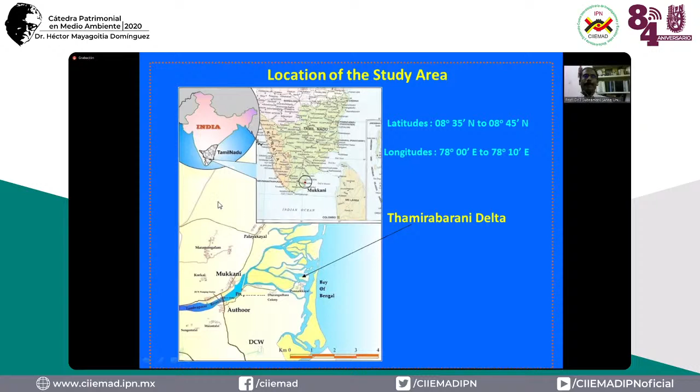In Tamil Nadu, there are many river basins. In the center of the state there is a huge river system called River Kaveri. And this river basin is located in the southern part of Tamil Nadu. I have chosen this deltaic area for detailed investigation. This river basin is known as Thamirabarani River Basin.

It originates in the hilly areas known as the Western Ghats. The main stream of the river is considered to be a perennial river, so throughout the year we can expect water flow in this particular river. Finally, this river confluences with the Bay of Bengal. So here we have the sea, Bay of Bengal.

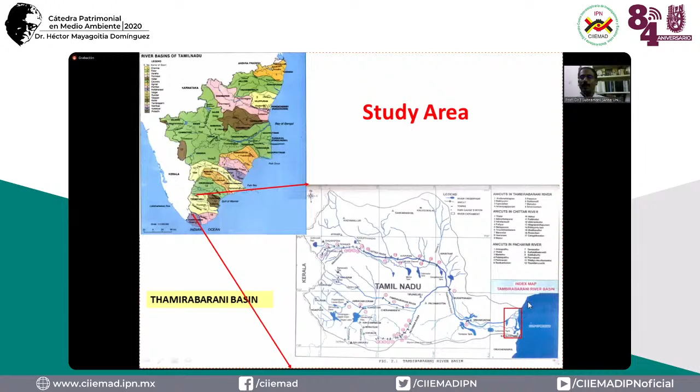Then coming to the problem, here you can see the photographs and the satellite image. Initially I have taken this satellite image for detailed study, and this is the IRS-1D. Name of the satellite is Indian Remote Sensing Satellite 1D. And the name of the sensor is LISS-3, Linear Imaging Self-Scanning Sensor 3, with the resolution of 23.5 meters. Spatial resolution of this satellite data is 23.5 meters.

So here is a false color composite image, and the red color indicates vegetation. So all along the river course, Thamirabarani river course, we can see thick vegetation. And here, this is actually a sand dune, very close to the coastal area. It is green in color because I told you it's a false color composite. And in this area, we can see a lot of salt pan activities.

Here you can see the photographs, and this is the barrage or weir constructed across the Thamirabarani river. This is the last weir. There are so many weirs constructed in the upstream, in the hilly areas, and here, this is the last weir or barrage. Then there is a bridge here, constructed by the Highways Department.

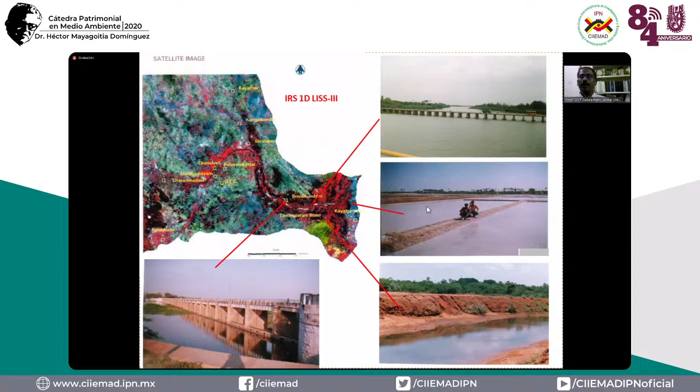And here you can see a lot of salt pan activities are going on. They are producing salt. Sometimes they are using seawater directly, and sometimes they are using saline groundwater for producing salt. Here in this picture, you can see there is a pumping station. This pumping station is located here.

There are so many industries located in this area, and of course, they are processing the beach sand. In this part of the coast, the sand has a lot of heavy minerals, and this coastal area is known for heavy minerals. So many industries are processing the heavy minerals, and they are extracting titanium from ilmenite and rutile, and thorium ore. Monazite is also enriched in beach sand, and we have garnet, we have magnetite. So many heavy minerals are available in the beach area. That is why so many industries are located in this region.

They are simply bringing the sand from the coastal area, processing the sand, and separating valuable minerals and metals. And for their industrial purpose, they are directly taking this river water. The industry people are directly taking the surface water, river water, for their industrial applications.

So particularly during summer season and also during high tide period, the seawater is entering into the river channels and contaminating the river water. This effect is noticed up to the place called Eral, about 7 kilometers inside. Because of this seawater incursion, people are not able to use the water for their industrial applications. And farmers are also struggling a lot. They are not able to use the river water as well as the groundwater for their agricultural activities.

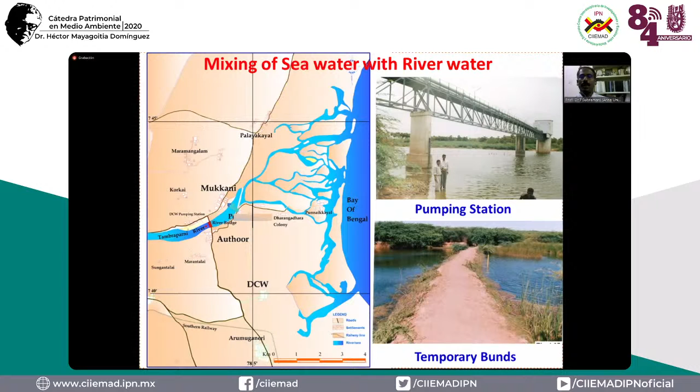So knowingly or unknowingly, they are deepening the river channels. If the river channels are deepened, then more seawater can enter into the river system. So this mistake they are doing in the coastal area. Here you can see the river channels. Once the bund is broken and the sand material is pushed into sea, they are again making the bund. So it is a continuous phenomenon. These bunds are completely washed away by the river water.

And to understand the tidal fluctuation, we have fixed a scale. This side is towards sea and this side is the upstream river side. So we fixed a scale here to measure or understand the tidal fluctuation at this particular area.

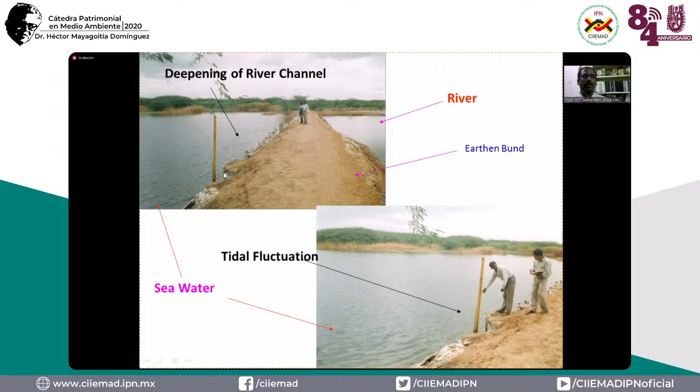Then here we can see another important issue. In this photograph, you can see good agricultural fields. There are a lot of trees and some crops. And what these poor farmers are doing is simply converting the fertile agricultural land into salt pans. In some areas, fertile agricultural lands are converted into salt pans. Why? Because if they do agricultural activity, they are getting less revenue, less money. So to earn more money, they are converting the agricultural fields into salt pans.

Here you can see the salt pans, and because of this, the fertile land is affected. This photograph shows salt-affected agricultural land. It is not easy to go for reclamation of the contaminated areas. The soil is completely polluted. So not only the river water and the groundwater are polluted, the land is also polluted. Soil is also polluted. So this is the salt-affected land in this area.

And here you can see this gentleman. He is measuring the density of the water. Why? Because they are not taking the seawater directly for producing salt. They pipe and take the saline groundwater. When you go down, obviously the density of the water is more and the groundwater is more saline, so they are able to produce more salt. That is why people are using saline groundwater for producing salt.

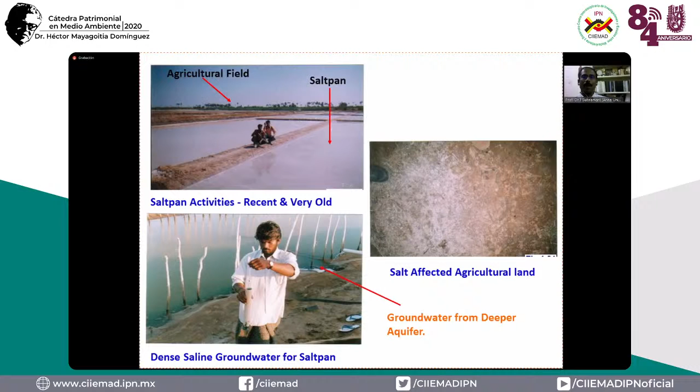Because of pumping of groundwater from the aquifers, seawater incursion or seawater intrusion is also taking place in the aquifer system. So it is not only spoiling the surface water or river water, it is also contaminating the aquifer system. Keeping all these things in mind, we have chosen this area for detailed investigation.

Initially, we prepared various thematic maps using satellite images and a geographical information system. These are some of the maps we prepared from satellite images and also based on already existing maps. This is the drainage map of the area. Here you can see the main stream, Thamirabarani River, and the distributaries. These are the major water bodies, tanks, in this study area. And you can see the major settlements or villages in this area.

This shows the watersheds or sub-basins in this area. This is the major basin, and within the basin you can see sub-basins and watersheds, and these are the names of the watersheds. And in this map, this is the land use map of the study area. We can see various land use categories. For example, this is the salt pan. Salt pan is here, swampy area is here, and in this area you can find dry crops.

So here this map is actually a geomorphological map. And also I have marked the lineaments. These are all the lineaments. With the help of the satellite image, I have prepared this lineament map. So we have identified the major lineaments.

And you can see the swampy area, beach terraces, beach ridges. So many geomorphological landforms are identified, and you can see them in this map. And sand dunes. These are all the stabilized sand dunes, and you can find the sand dune here. It's a wind deposit. So this map gives various landforms in this area.

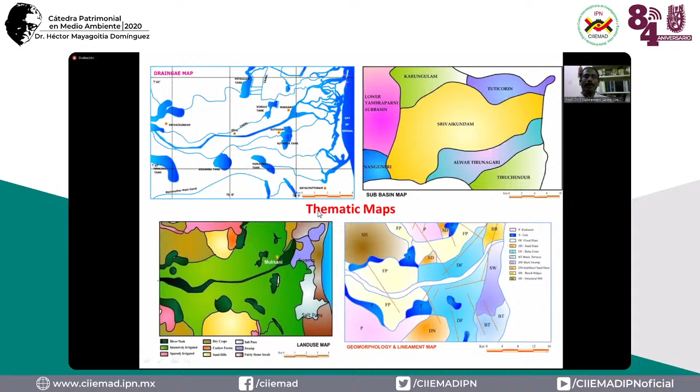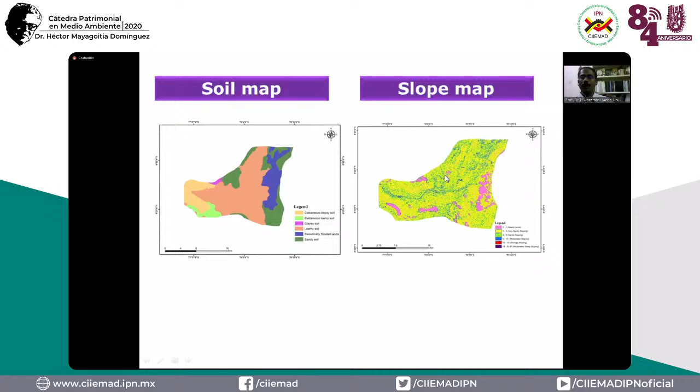So slope is also another important factor here. Because the terrain is almost flat or gently sloping, seawater intrusion is taking place. So we have to consider this slope also for detailed investigation. Then we collected secondary data from various government and private departments.

And I have already told you there is a bridge constructed across the Thamirabarani River in the deltaic area. At the time of construction of this bridge, they did a lot of estimation. For example, they calculated the discharge, how much quantity of water is passing through this area.

Then they went for pile foundation, so they studied the subsurface also, what kind of strata is available below the riverbed. So many details we have collected from the Tamil Nadu Highways Department.

Then, I told you this is the last barrage constructed across the river. It comes under the Tamil Nadu Public Works Department. From this government agency, we collected the surplus details, how much quantity of water is passing through this particular barrage. And here we can find the canals also. There are canals in this barrage on the right side as well as the left hand side.

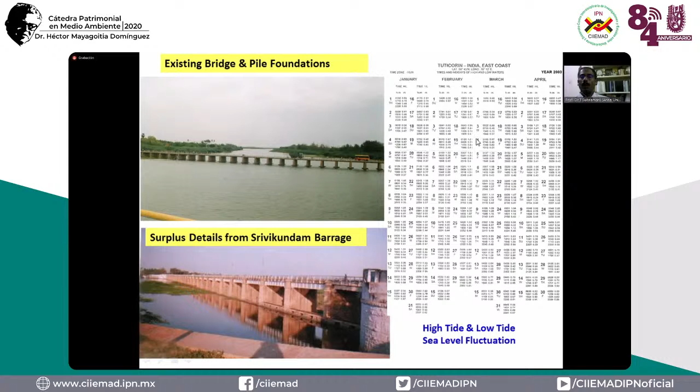And a port is also there in this area, the Tuticorin port. From the port we have collected data. We have collected the tidal fluctuation data, high tide and low tide details, from the Tuticorin Port Trust.

Then after collecting the secondary data, we went for land use land cover change analysis. So this is the land use land cover change detection analysis. We have taken the satellite image of 1998, and this land use land cover map was prepared. We have taken a few major land use categories and identified all the categories with the help of the satellite images.

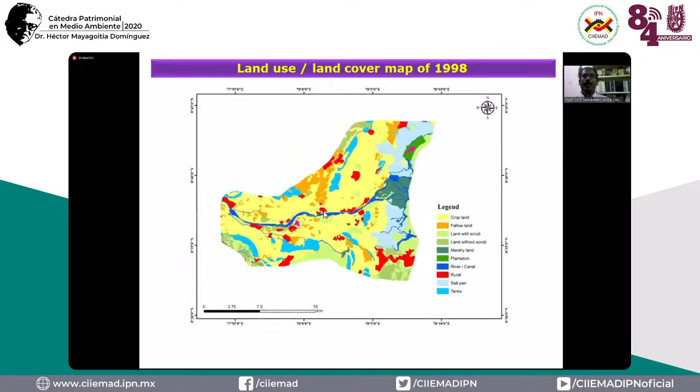So here you can see the cropland, fallow land, land with scrub, land without scrub, marshy areas, then plantation, then salt pans. So this is an important thing, salt pan activities. Then this is the land use land cover map of 1998. Then we prepared the land use land cover map of 2018.

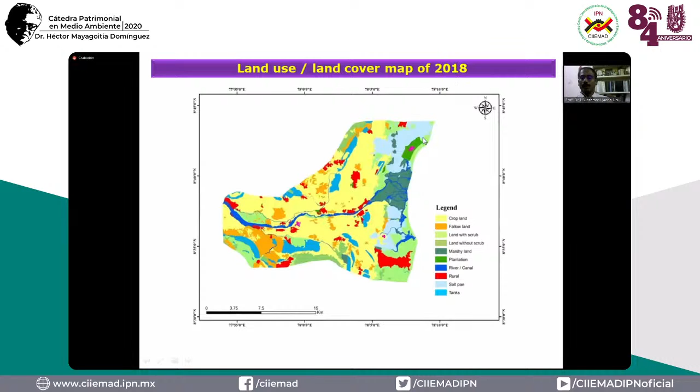So finally, we made a tabular column here. In this we can see the variation, the change detection. Particularly if you see the salt pan, the salt pan area has actually increased, by about 5.79 square kilometers, and the plus symbol indicates increase and minus symbol indicates decrease. Some of the land use categories decreased and some increased.

And of course, in the case of water bodies, rivers or canals, there is not much variation. And some of the lands with scrub and without scrub were converted. Okay, this is the overall land use land cover change scenario in this area over a period of 20 years.

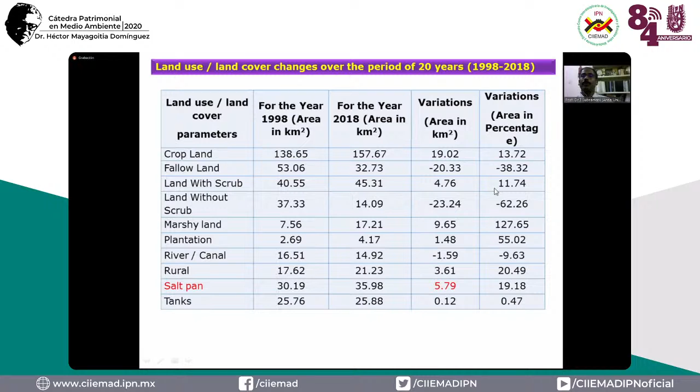Then we collected water samples, groundwater samples and surface water samples, for understanding the suitability for consumption purposes. In this area, these are all the sampling locations. This red dot indicates groundwater sampling locations, and this pink dot indicates surface water samples.

We collected 40 groundwater samples and 21 surface water samples during the winter season as well as the summer season. To understand the seasonal variation and the spatial variation, we collected samples during winter and summer.

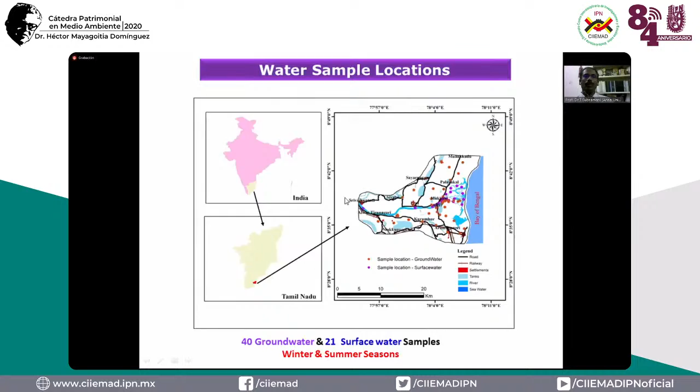So here you can see the summary of the water quality analysis. You can see the analytical results. We have presented the maximum, minimum and average values for winter season as well as for the summer season. This is for groundwater samples. I have mentioned 40 groundwater samples we have collected, and this is the summary.

So here you can see the TDS value. The TDS maximum is about 36,800 milligram per liter, and the average is 5,134 milligram per liter. We all know that as per the WHO, World Health Organization standard, if TDS is more than 1,500 milligram per liter, the water cannot be used for drinking applications. Here the minimum value is of course less if you go to the upstream side. The minimum value is 100, the maximum value is 36,800.

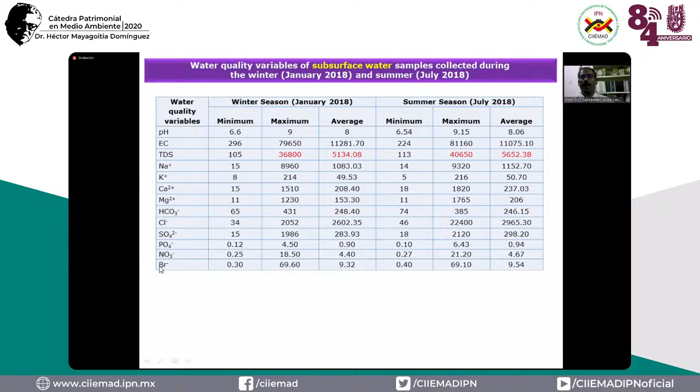Similarly, in the case of summer season, it is higher actually. The maximum value is 40,650 and the average is 5,652. That is why people are not able to drink the water in various villages or locations. And you can see the minimum and maximum values of the other parameters. Particularly for seawater intrusion, we must concentrate on sodium, chloride, and bromide also.

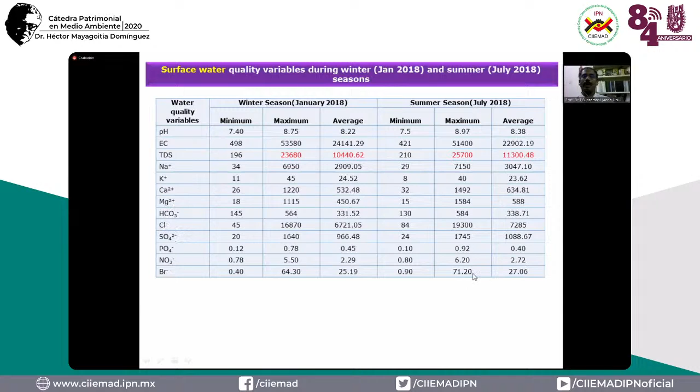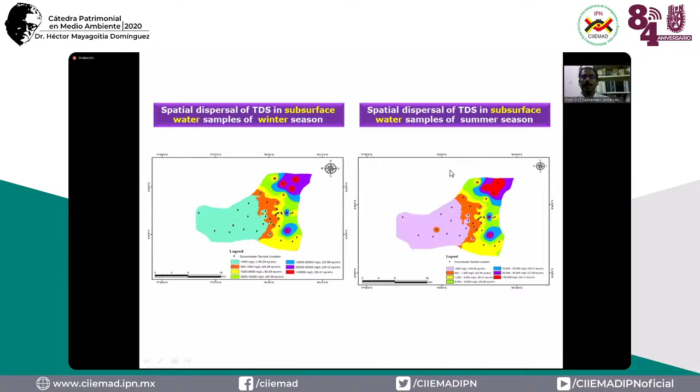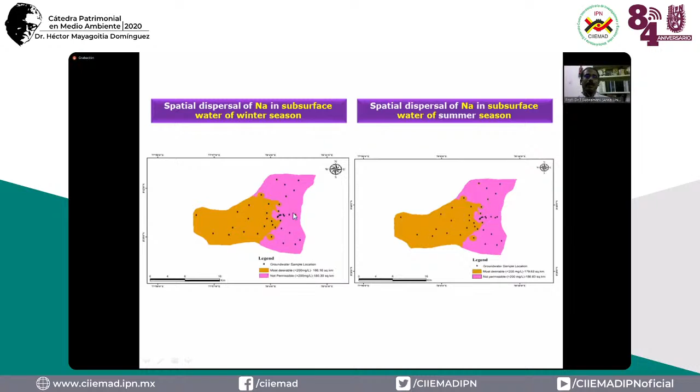Even this yellow, green, blue, pink, and red. This entire area is not suitable for drinking as per WHO standard. Sorry, this is winter and this is for summer season. And this is the scenario based on sodium concentration. We made two categories. If the sodium is less than 200 milligram per liter, it is suitable for drinking. If it is more than 200, we will not use it. You can see this area is not suitable for drinking, and similarly this area is not suitable for drinking.

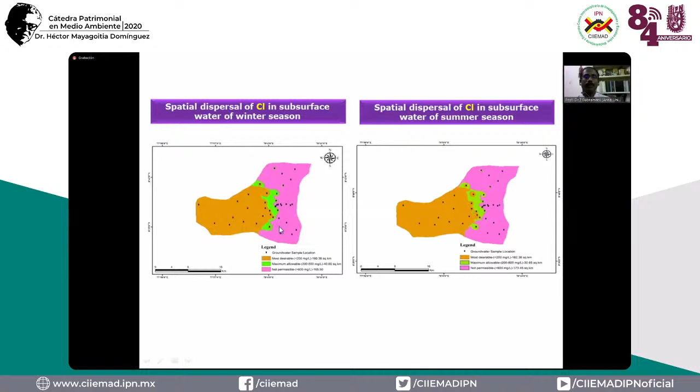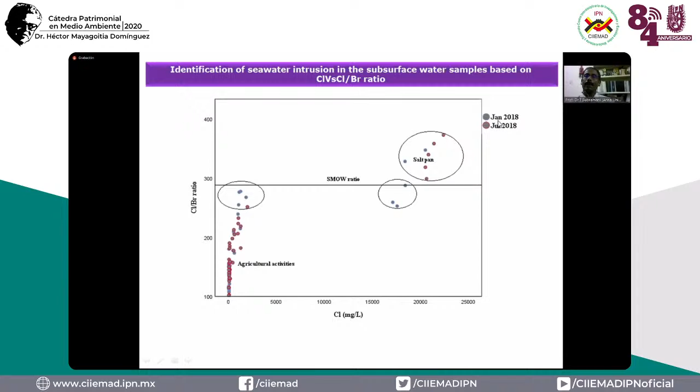Then finally, we have prepared this chloride by bromide ratio, and in this diagram we can see we have plotted the points. On the x-axis I have taken chloride, and on the y-axis I have taken the chloride/bromide ratio. This is the SMOW line, and some of these dots are indicating salt pans, and here you can see the agricultural activities. So this is an important indicator, and here I have taken the monsoon season samples, the summer season as well as the winter season.

This will reduce the porosity because the sodium content is more. Salinity is more, sodium content is also more. Then this water will reduce the porosity of the soil, so the plant roots cannot freely penetrate into the soil. The soil will become very hard, and finally it will affect the crop yield. So we cannot get more yield. Normally, what people will do is sometimes they will apply gypsum. Gypsum can give some kind of remedy.

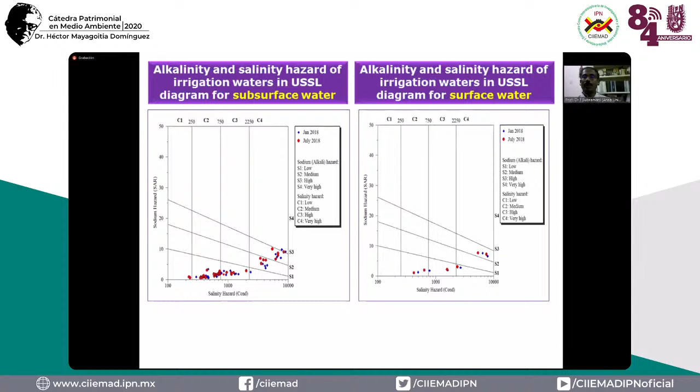And here also you can see the surface water samples, and some samples are representing this C4S3 field. So this water should not be used continuously, particularly for soils having poor internal drainage. It will affect the porosity as well as the permeability of the soil.

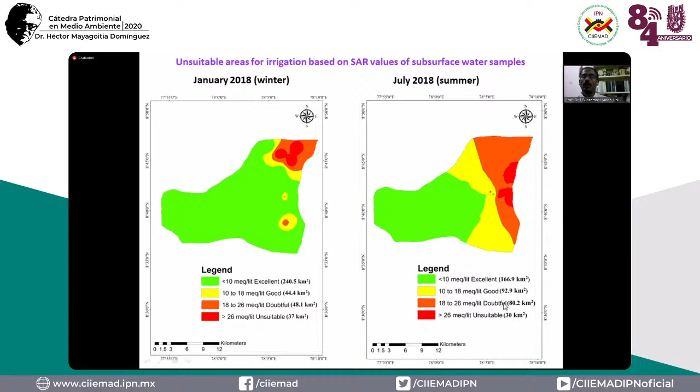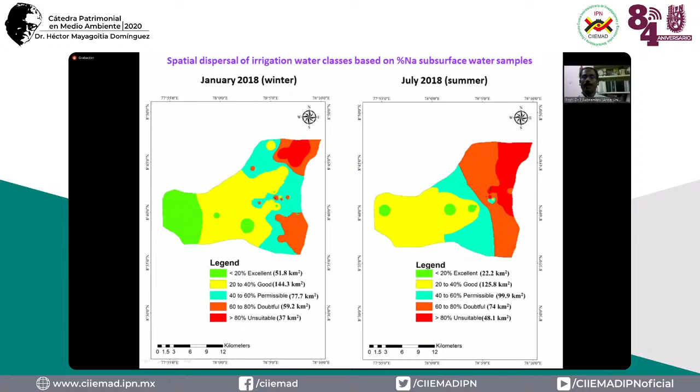The surface water is also affected. That is why the pumping station at this site is not able to directly use the surface water or river water for industrial applications. If the water is not suitable for industry, then the water cannot be used for drinking as well as for irrigation purpose.

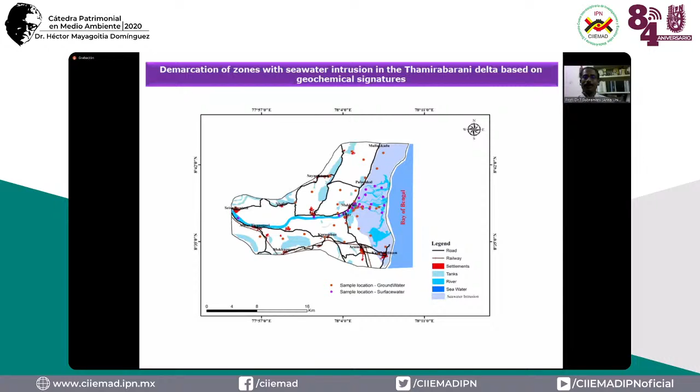So finally, we have assigned ranks and weightages. Based on the ranks and weightages assigned, we have used, of course, GIS to integrate or superimpose the maps and thematic layers. We have used GIS, and finally we have prepared aquifer vulnerability maps of winter as well as for summer season.

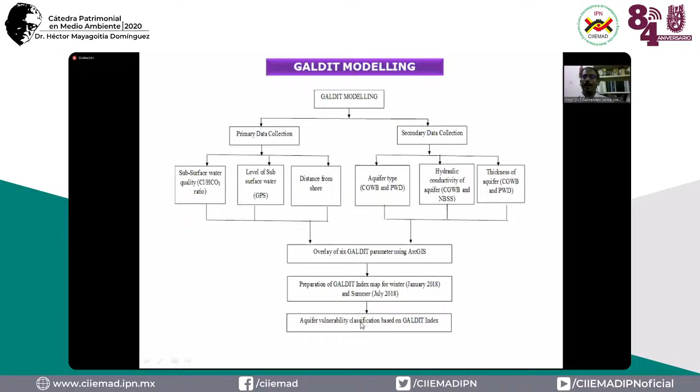And these are all the 6 parameters considered in this model. G in the GALDIT is groundwater occurrence, A is hydraulic conductivity of the aquifer, and L is depth of the subsurface water level, groundwater level, and distance from the shore is indicated by D. I is the impact of the current marine intrusion status. Then T is nothing but the aquifer thickness.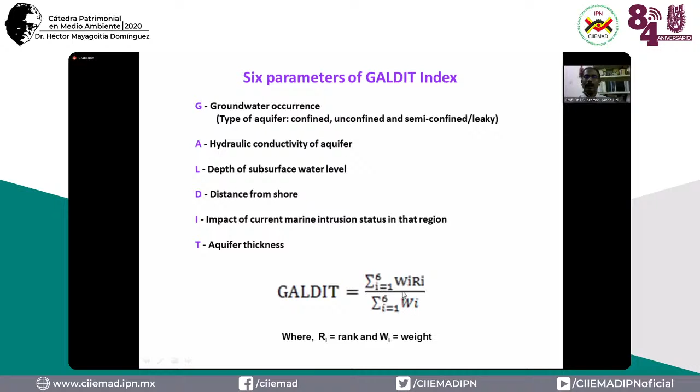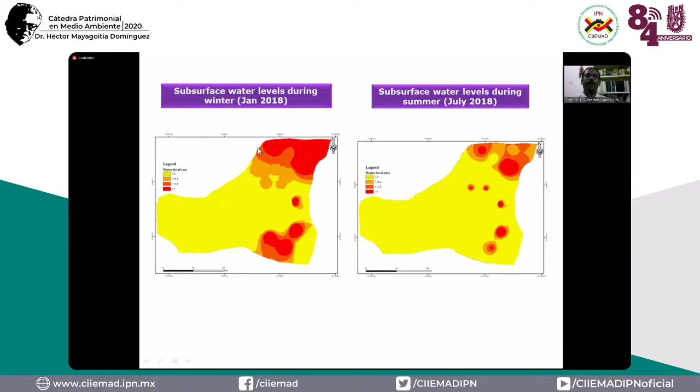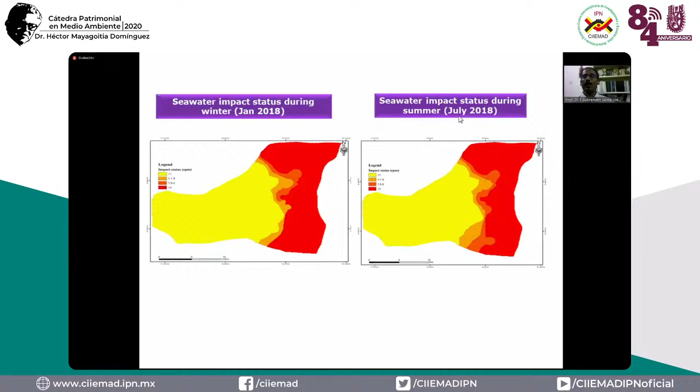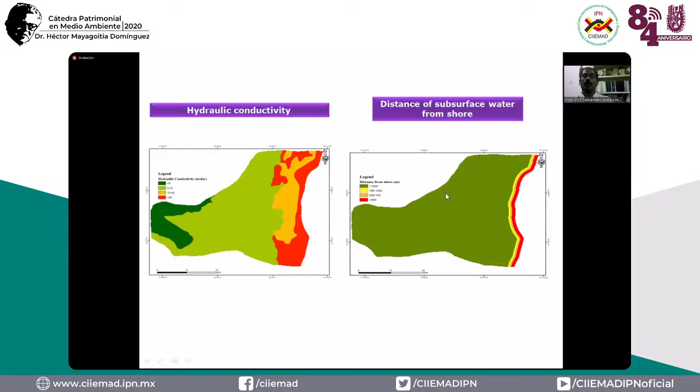And here you can see the hydraulic conductivity. Hydraulic conductivity is more in the sand formation. So here you see hydraulic conductivity is more here, and hydraulic conductivity is less here. And here you can find hard rock areas. And this is the map showing the distance from the shoreline. So 500 to 1000 meters. Above 1000-meter distance is indicated using this green color. So this is an important parameter used in the GALDIT index model.

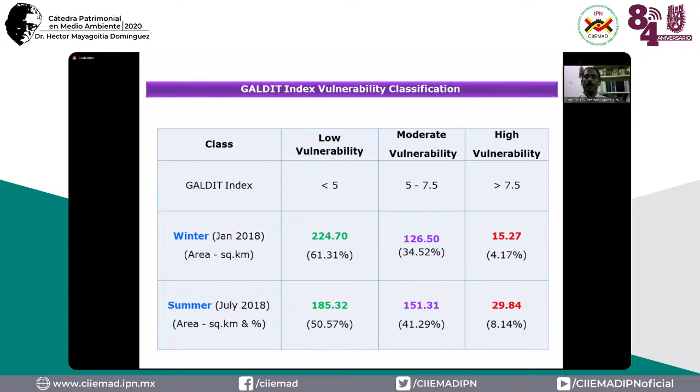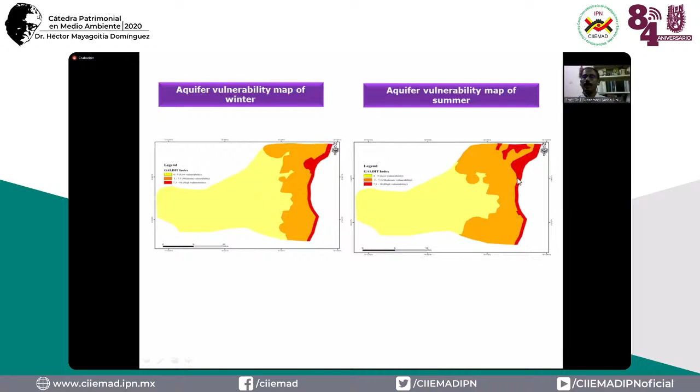So initially, based on the geochemical signatures, we have identified and demarcated the seawater intruded areas, and we have done this GALDIT model to identify the vulnerable areas. So this is the final map. This is for winter season, and this is for summer season. Here 3 categories you can see: low, moderate, and high. This is highly vulnerable for seawater intrusion, this is the moderate vulnerable, and this is low vulnerable zone.

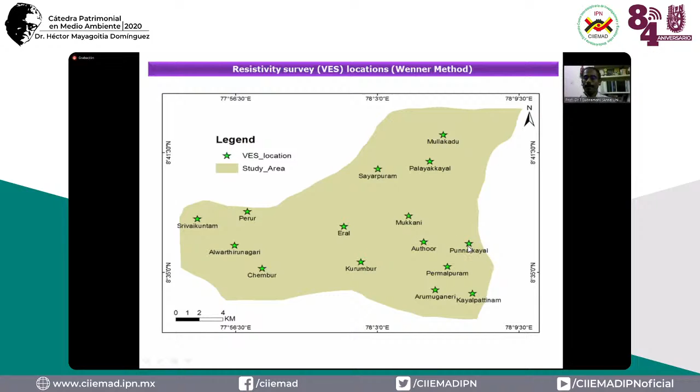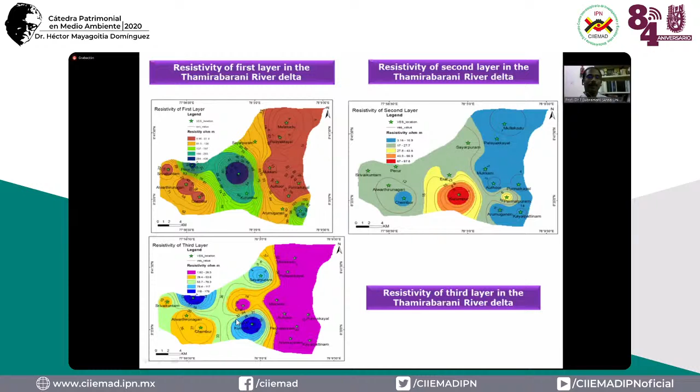So here you can see the values, and we have prepared the isoline maps as well as the zonation maps. Isoline maps are nothing but the contour maps connecting the points having the same values, and choropleth map is nothing but the zonation map. We made it into different zones for easy understanding, for easy visualization. And here this is the resistivity of the third layer. Then these maps are showing the thickness of the layers, the thickness of the first layer and the thickness of the second layer.

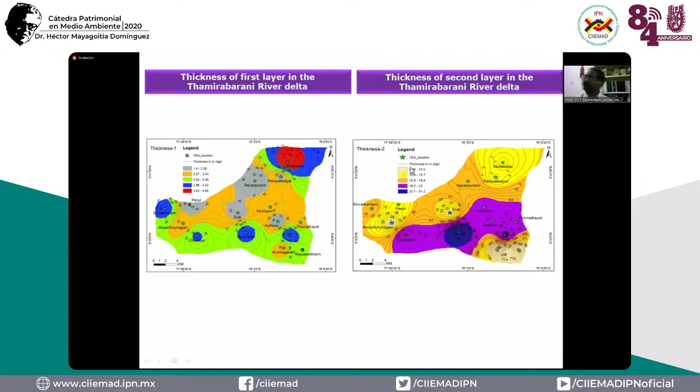Then finally we have compared all the methods. So this is based on the geochemical signatures, this is based on GALDIT modeling, and finally this is based on vertical electrical sounding. So almost you can see the match.

So based on the geochemical signature, this much area is affected, and here also you can see this is highly vulnerable, and here also the electrical resistivity survey is showing almost a similar kind of result.

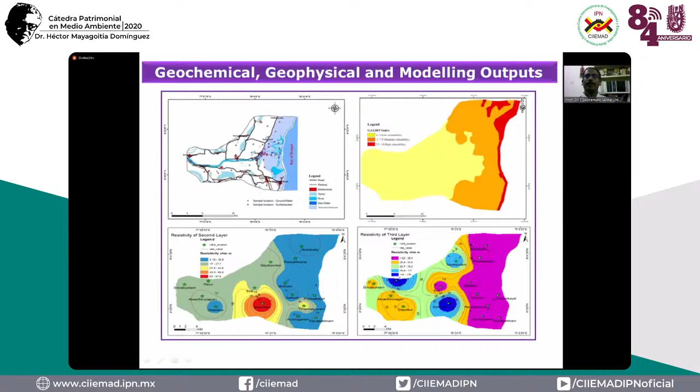Then finally, we have to give a solution to the people. Most scientists and geologists are approaching the problem, identifying the problem, collecting a lot of data, publishing a lot of papers, but we are not giving the solution to the public. So here we have given an engineering solution to the people. We cannot stop it 100%, so to minimize the seawater intrusion, we have given the solution.

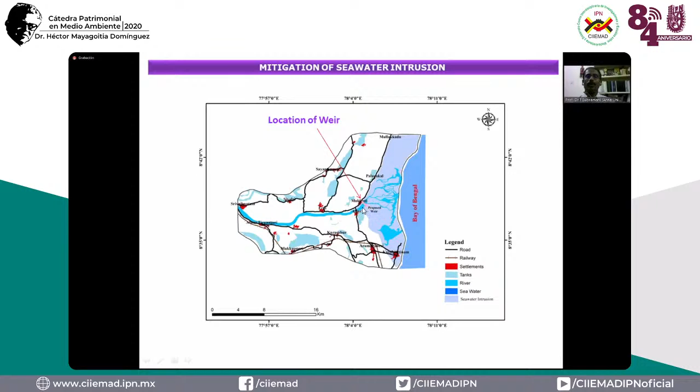Then, keeping all the data, we finally identified a site to construct a weir across the Thamirabarani river to minimize the intrusion. This is the place called Mukkani. We have identified this site for constructing the weir. It's a kind of solid weir. So we have done the design parameters.

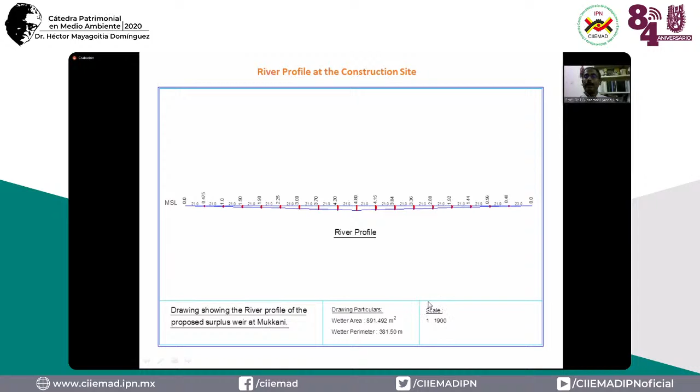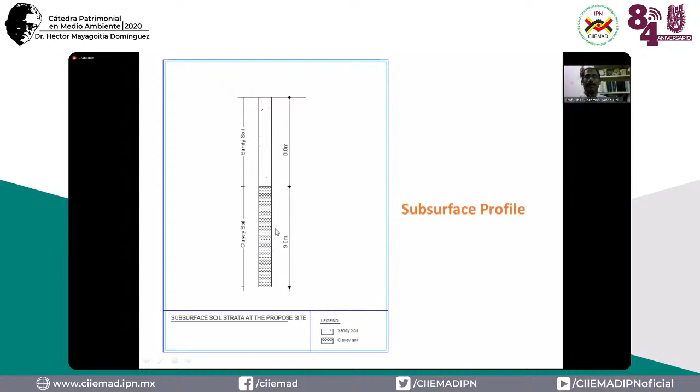And here you can see this is the profile of the river. So we got the river profile, in large scale; here the scale is 1:1900. It's a large scale map. Then this is the subsurface detail. On the top we have sandy soil, and below that we have clay soil. So accordingly we have to go for the foundation.

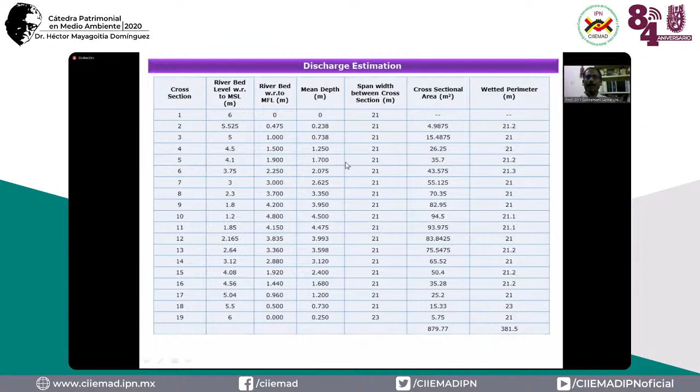Then this is about the river discharge. We got details from the Tamil Nadu Highways Department, and we also collected data from the Public Works Department. We have considered all these parameters: wetted perimeter, depth, river bed level, everything we have considered for the weir design. And here you can see the velocity and discharge calculation.

As per our calculation, we got the maximum discharge at the proposed site as 1873 cubic meters per second. This much quantity of water is passing over the area. At the time of the construction of the bridge by the Highways Department, they estimated it as 1450. So we estimated 1870, and they estimated 1450 cubic meters per second.

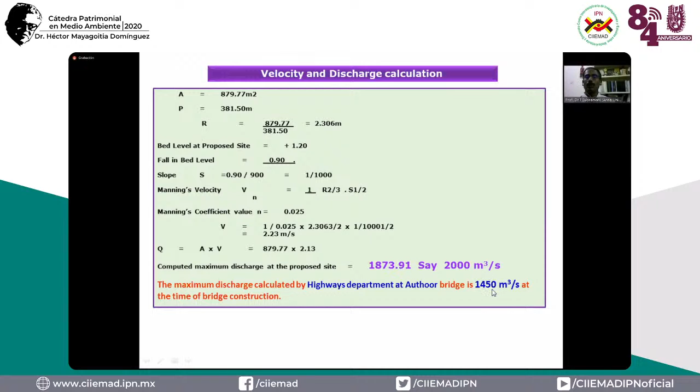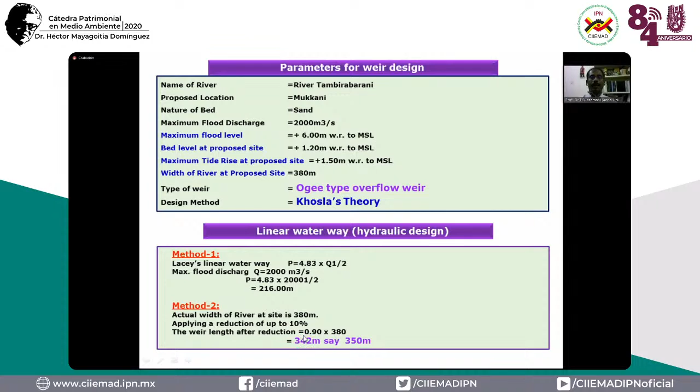Finally, we decided to construct an ogee type surplus weir or overflow weir, and we used Khosla's theory and Manning's formula for establishing the design parameters and linear waterway. We used two methods and got this value. The linear waterway we have taken is about 350 meters.

For the crest level, we decided to construct a 1 meter height solid weir across the river channel. If the height of the weir is more, the afflux rise will be more on the upstream side. It will submerge the area and act as a barrier for flood, so during flood season a lot of areas will be submerged or disturbed. That is why we decided to go for a 1 meter height solid weir in the deltaic area.

The crest level of the weir is about 2.2 meters. The bed level is 1.2 and the height of the weir is 1 meter, so the crest level is 2.2 meters above mean sea level. The scour depth we calculated using the standard formula, and this is the scour level we got.

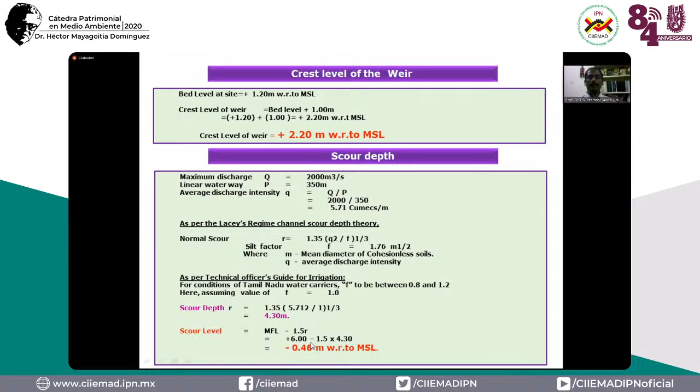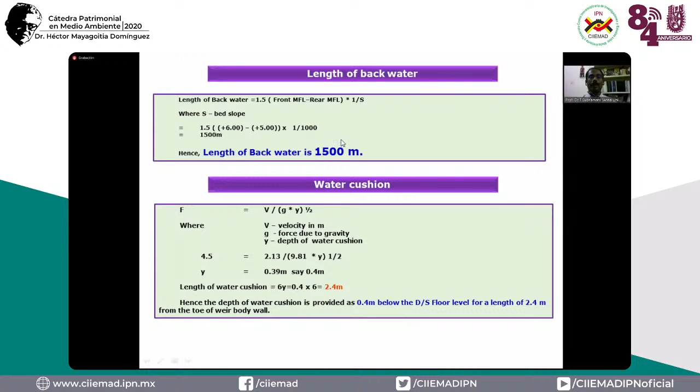Here you can see the length of the backwater. If you construct a weir, or put some hydraulic structure across running water, there will be backwater on the upstream side. It is about 1500 meters. And the length of the water cushion should be 2.4 meters.

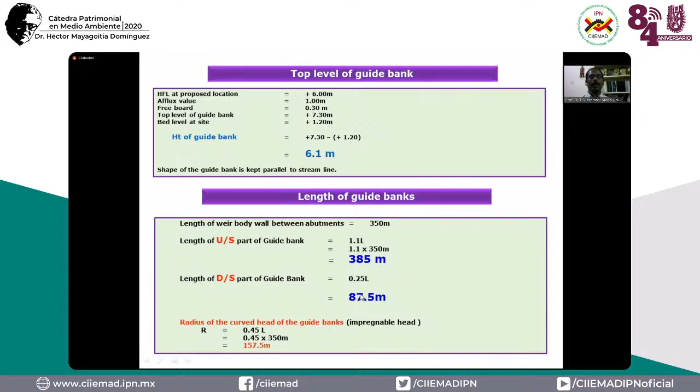Then guide banks. We have to guide the flow towards the hydraulic structure. The height of the guide banks is 6.1 meters, and the length of the guide bank on the upstream side is 385 meters. On the downstream side also, guide banks should be put, up to approximately 90 meters from the weir. And this is the key plan of the abutment and cutoff walls, and this is the sectional view of the abutment and return walls.

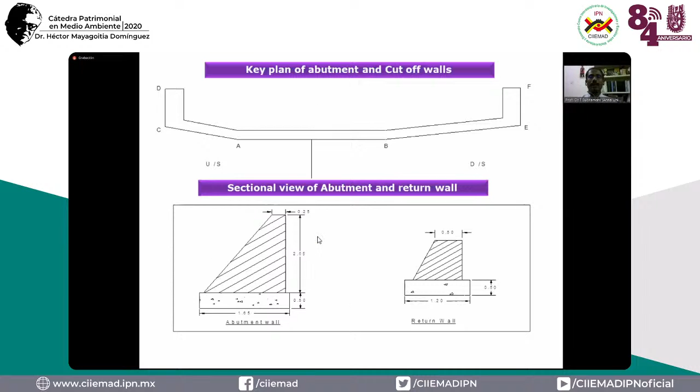And here we decided to go for two cutoff walls or sheet piles. One is in the upstream side, another one is in the downstream side. Normally we will not provide this cutoff wall. This downstream cutoff wall is mainly to avoid the piping failure of the hydraulic structure.

So if you don't put this cutoff wall, what will happen? This water running below this hydraulic structure or weir will remove the sand particles, and piping failure will occur. So to avoid piping failure of the structure, we have to put this downstream sheet pile.

And this upstream sheet pile is to minimize the subsoil hydraulic gradient. So if you don't put this, what will happen? If you put this structure, it will reduce the pressure. So to reduce the upliftment pressure, normally they will provide this cutoff wall. This is the initial subsoil hydraulic gradient and this is the ponding. Here the water storage will be there.

And if you put the cutoff wall here in the upstream side, this is the weir, this side is upstream side and this is the downstream side of the weir. If you introduce this cutoff wall, suddenly the subsurface hydraulic gradient, that means the upliftment pressure or the pore water pressure, is reduced. And obviously, if you put downstream cutoff wall, it will increase the pore water pressure. But to avoid the piping failure of the structure, we need to provide this downstream cutoff wall.

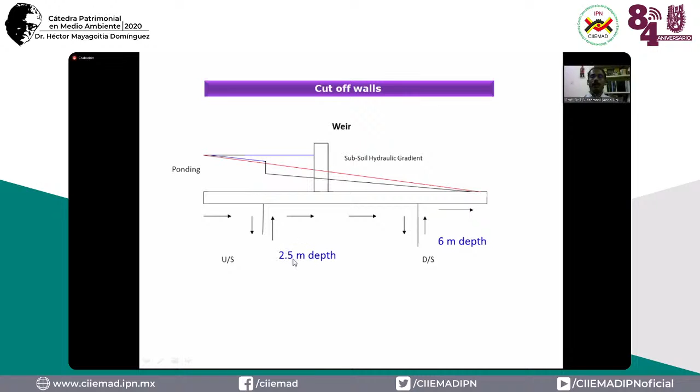So this is the depth. Up to 6 meter depth we have to provide here. Up to 2.5 meters depth we have to provide in the upstream side.

And finally, we have done the stability check. If the river is carrying water up to the crest level of the weir, whether this structure will be stable or not, because we are going to construct the weir over the sandy bed. If the river is carrying huge water during flood season, the structure should withstand. It should be stable. That is why we have done the stability check.

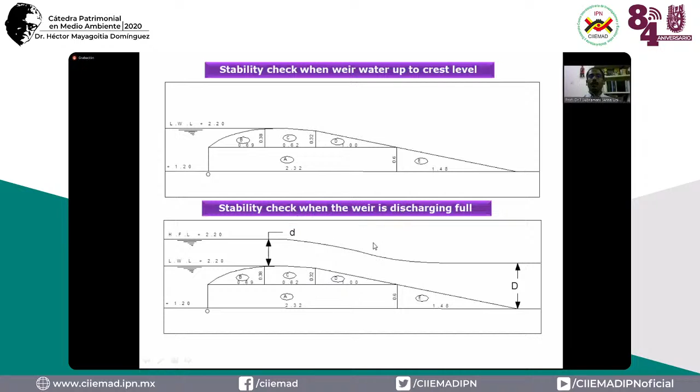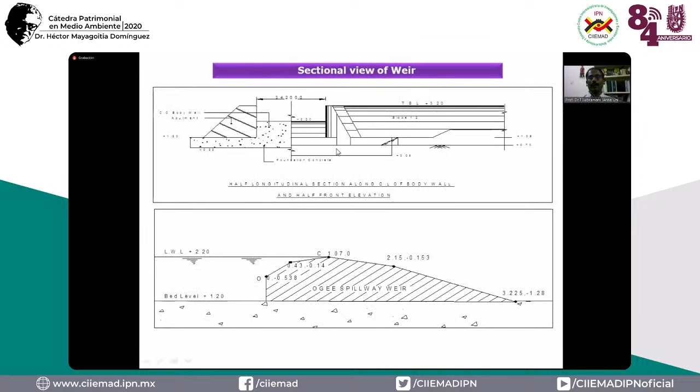Before coming to the conclusion part, I will tell you the importance of this work. After completing this work, we have submitted the report to the government. Otherwise, there is no meaning in conducting study and publishing the data in the form of journal papers. So after seeing the conclusion, I'll tell you what happened to the report submitted to the government.

So here you can see this construction of this weir will minimize the entry of seawater into the river system. Obviously, it will minimize the entry of seawater because the temporary earthen bunds are frequently washed away by the running water. So this will be a kind of permanent solution. It will minimize the entry of seawater into the river channels.

And the construction of the weir will improve the groundwater head because some quantity of water will be stored in the upstream side of the weir, that is known as ponding. Because of that, groundwater recharge will take place and it will improve the groundwater head. So this will minimize the seawater intrusion in the aquifer system.

And in future, we can divert the river water to the salt affected areas through canals. We can construct 2 canals. On either side of the weir, we can create canals and we can divert the excess water because it's a perennial river, and also during flood season, this river is carrying huge quantity of water.

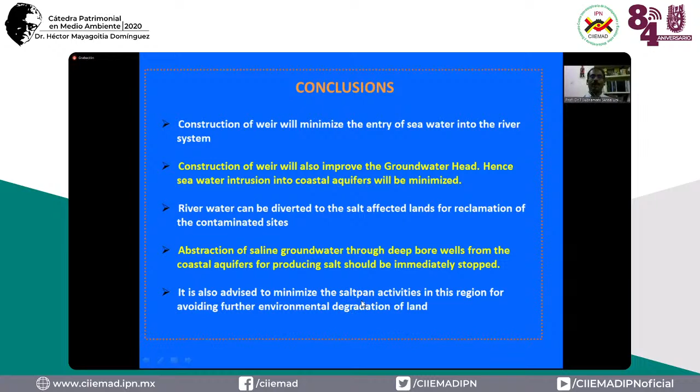Then another thing is salt pan activities. If you don't minimize or stop the salt pan activities, then we cannot get the proper remedy for this. So these are all the recommendations we are submitting to the government. I told you our report is submitted to the government, and finally the government has accepted our proposal and they started constructing the weir. So now recently they have started constructing the weir.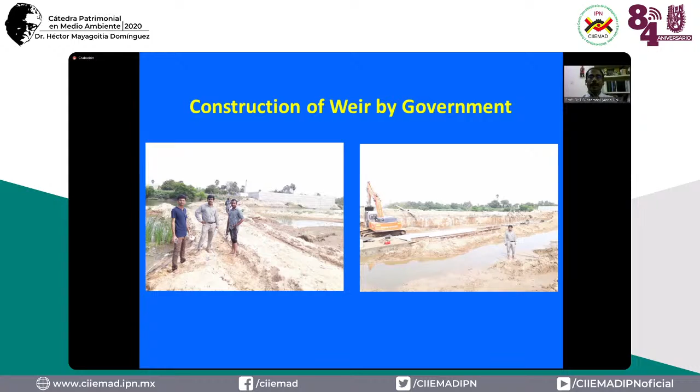So based on our report, now you can see the field scenario. They are constructing the weir. They already started constructing the weir in the coastal Tamarabarni area by considering our report. Of course, with the help of their engineers, government engineers, they have done the calculation. Of course, you can see a clear match. So here, we proposed one site, and they have taken the site very close to our site.

In our site, the width of the river channel was less, minimum 380 meters. Here the length of the weir is 460 meters. So we have taken the narrow path of the river to reduce the construction cost. And I will tell you the reason why they have chosen this site.

As per their calculation, the height of the weir is 2.5 meter with respect to MSL, crest level of the weir. Based on our calculation, it is 2.2, because they decided to construct a 1.3 meter height weir. We proposed a 1 meter height surplus weir. Then the maximum flood level is about 5.9, and as per our calculation, it is about 6 meters.

And we assumed the maximum discharge as 2000, but they have assumed almost double. I don't know how they have got this figure. As per the highways department, they got 1500, but they have assumed very high discharge. Maybe for the stability purpose, they have assumed high discharge.

And as per our suggestion, they have also decided to go for 2 cutoff walls or sheet piles, one in the upstream side, another one in the downstream side. We proposed a 6 meter cutoff wall in the downstream side, and they have decided to go for 7 meters. And we proposed a 2.5 meter depth cutoff wall in the upstream side. They have gone for 2.6 meters. So almost matching.

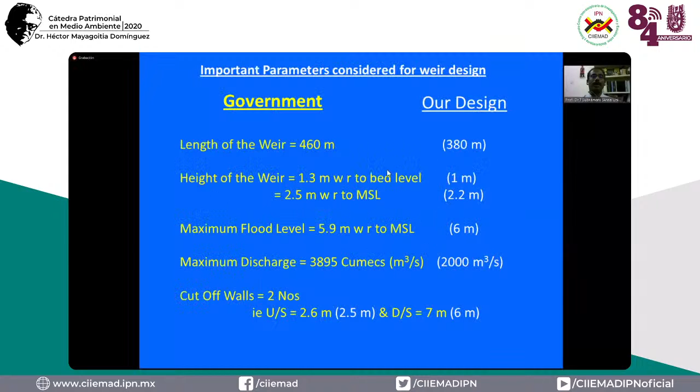Here the width of the river is more. You can see here, it is about 460. Obviously the cost will be increasing, but in our site it is this narrow river channel at this area, about 380 meters. So finally, the government has started constructing the weir to give a permanent solution to this particular problem.

Right, almost I have completed my talk, and in future we have to concentrate on the other aspects also. After constructing the weir, we have to study the performance of the weir. It is an important thing. And we can go for mathematical modeling for seawater intrusion using some software: ModFlow we can use, or some special software like Sutra is available.

GMS is available. We have to do mathematical modeling, and we are planning to use isotopes. We have to go for isotopic studies to understand the present day seawater intrusion and also the paleo seawater intrusion. So we need to go for isotopic studies.

Then, is it possible to suggest some more weirs in the distributaries of Tamarabarni River to further reduce the mixing of seawater with the freshwater system? That is another big question. Then another important thing: is it possible to go for a subsurface weir, subsurface barrier, or subsurface dike to minimize the seawater intrusion in this area?

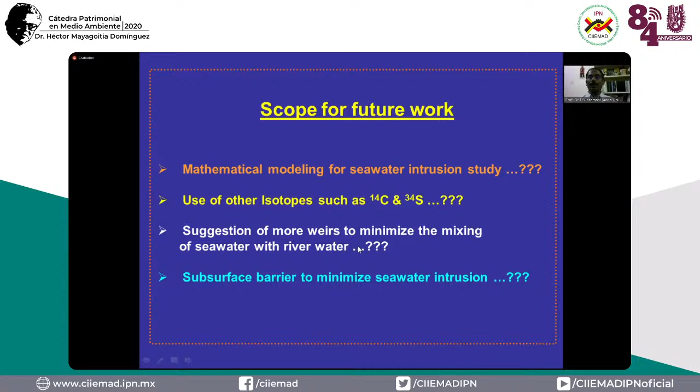Because it's a sandy bed, seawater is easily entering into the aquifer system. Is it possible to go for a subsurface barrier? Okay, so in future we are planning to work on these areas. So with this, I have completed my presentation, my talk.